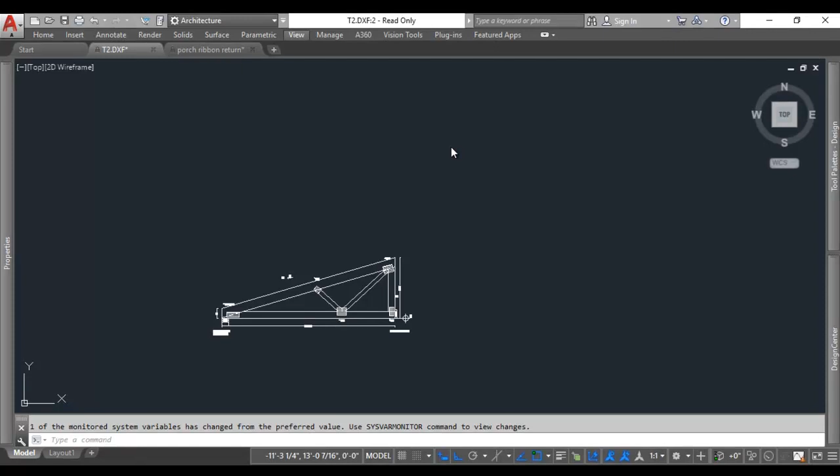Hello, this is Ryan, and in this next video tutorial we'll walk through the process for creating an isometric drawing of an actual truss. So the first step is to grab some dimensions off of your truss drawing so you know approximately what shape you're after.

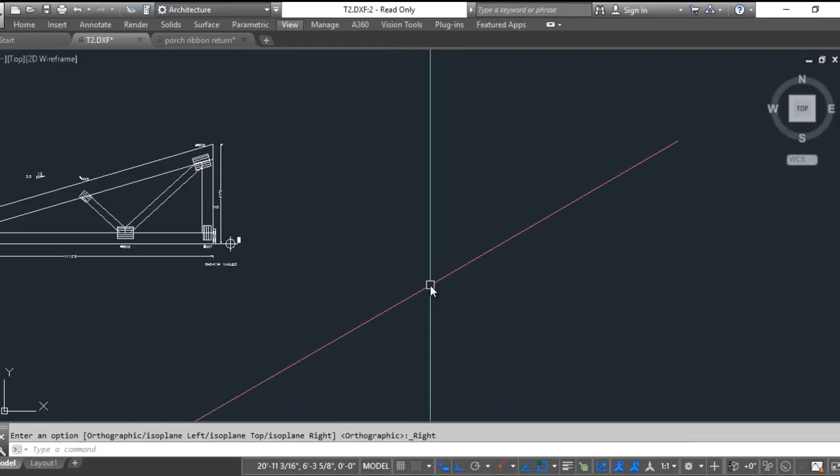So in this case, this is an 11 foot 10.5 mono truss with an 8-inch heel. 4 foot 1 9/16 is my high heel, and I have a 3.5/12 pitch. So I'm going to switch to my ISO draft with my button at the bottom and hit F5 until I get in the orientation that I want.

And my first step is to draw just the outline of the truss. I normally start here with the high heel. I have my orthographic on, 4 foot 1 9/16. My span, 11 feet 10.5, and then my heel is 8, and then hit C to close that. So there we have the outline of the truss.

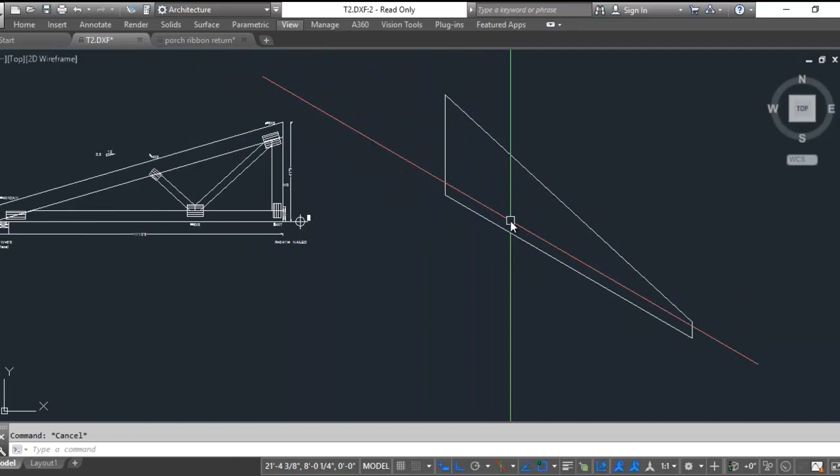The next thing is to get our webs and our chords, and we can't use the offset command in ISO draft, so we have to actually know the dimensions. So if it's a vertical or horizontal member, the easiest thing to do is a copy, and that bottom is a 2x4, I believe, so copy that up 3.5. My vertical web, copy it back 3.5.

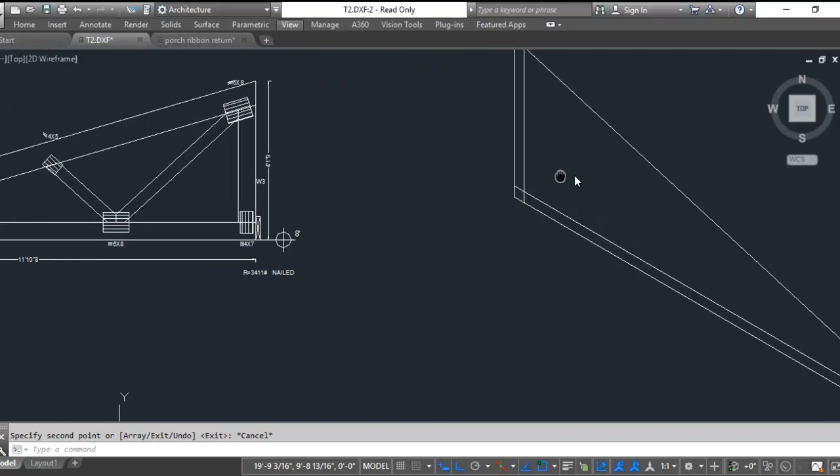Now to get this top chord, we've got to do a little bit more math, so I normally just bisect the top chord of my truss drawing with a line and then use the distance command to get the actual height, which is 7 9/16, which means that these are actually 2x6s. So I'll move those up another 2 and over another 2.

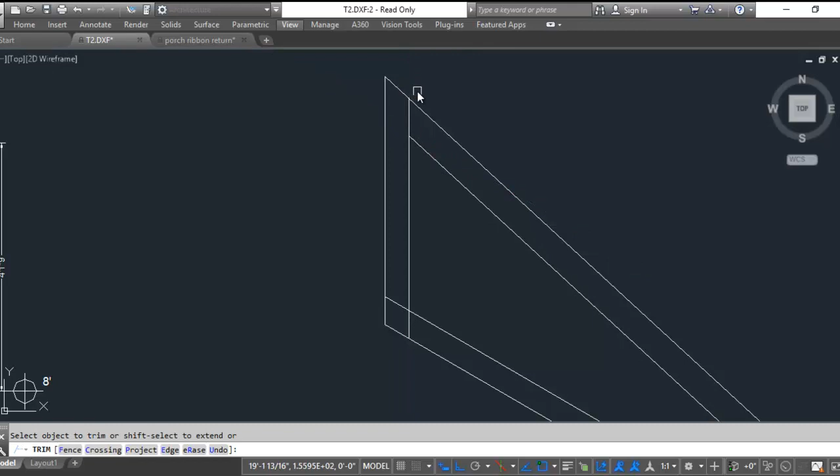So this here, if I copy it straight down, 7 9/16, that's the appropriate dimension for a 2x8. Then we can trim away the excess that we don't need. The way that these chords all come together, actually that's backward, looks something like that.

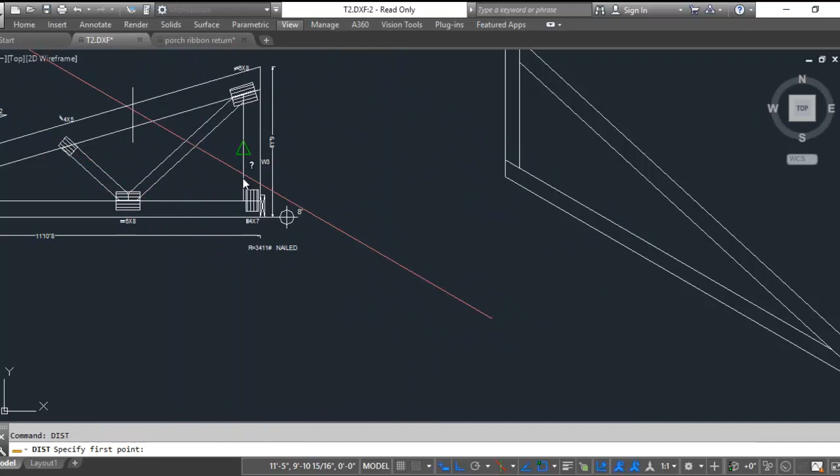Now for the webs, if you want to get them accurately, it's very possible to do them accurately, otherwise you can kind of ballpark it. We'll try and do them halfway accurate. So from the inner intersection to this panel point is 3 foot 5 5/16. So in my drawing, I can copy this forward 3 feet 5 5/16. That's that lower panel point, if you will.

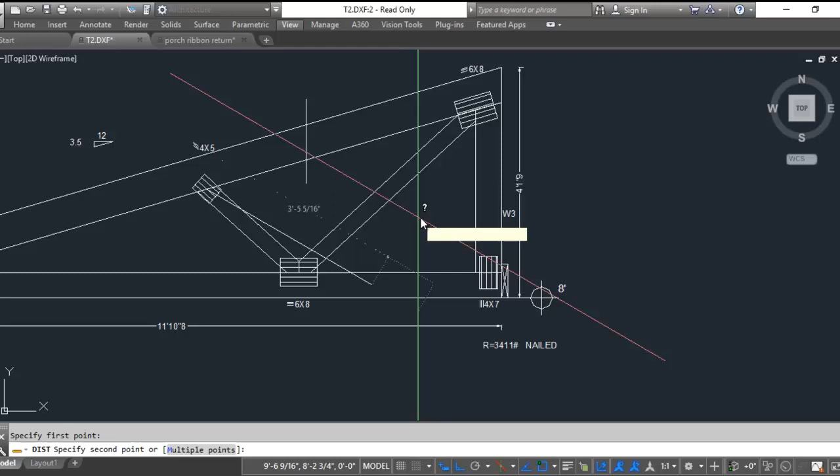And then this point here, I can do a distance and measure from the midpoint to here is 4 foot 10 3/16. So I can copy that forward 4 feet 10 3/16. And then from that point, it's just a matter of drawing lines for the center point of our webs. Get rid of my construction lines.

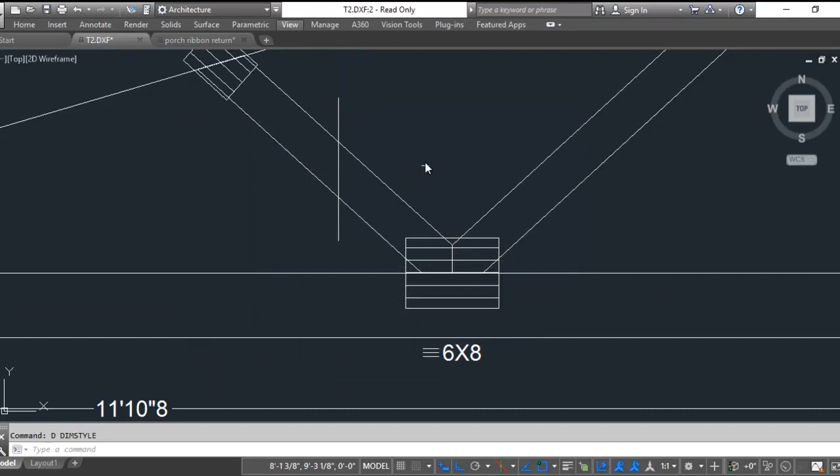And now we need to figure out how far to copy those. We can't offset, remember, so I've got to measure vertically. If I bisect this web, that's 4 11/16. So if I come back over here, half of that would be 2 and what would that be, 5/16 roughly, and then copy back up 4 11/16.

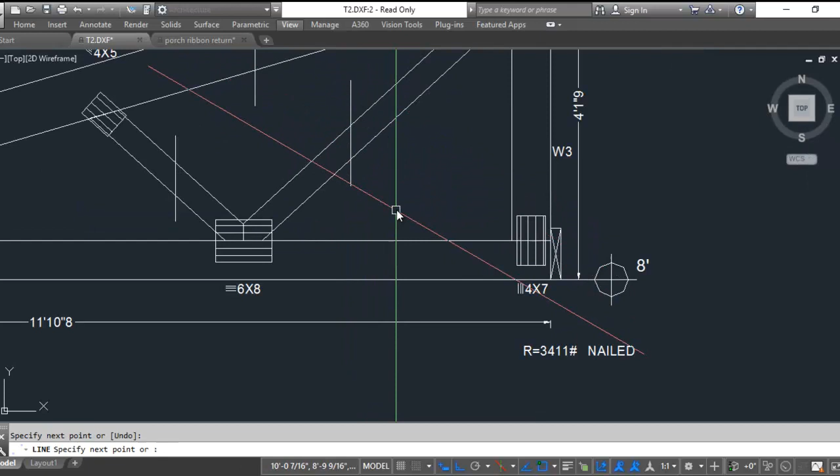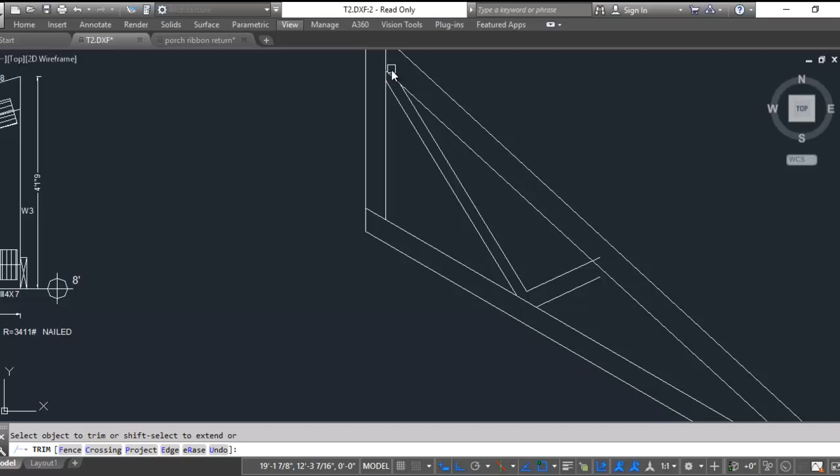That'll get us close. And then for this web, it's a different angle, so I should bisect it as well and measure it, and that is 4 3/4. So that'd be what, 2 3/8 is about half of it, like so. And then we just trim away the excess. And add in any additional lines, trimming away the excess.

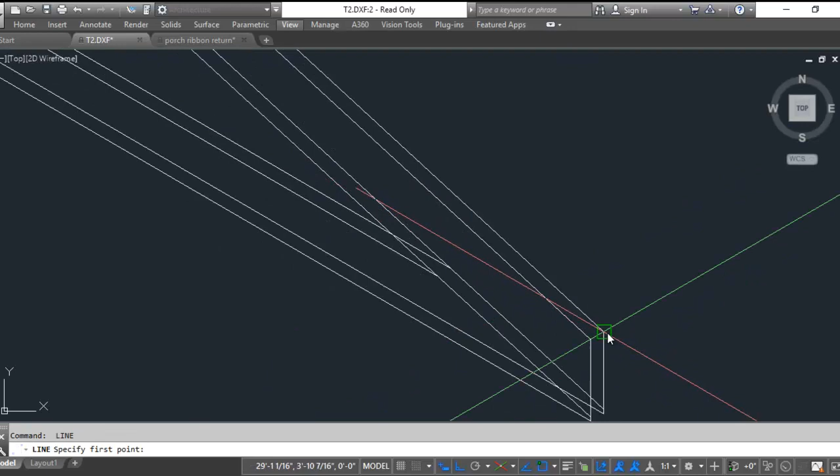So there's the face of the truss, and then to get thickness, all we do is take that truss, and I'm going to hit F5 to get my UCS moved that way, and move it over 1.5 inches. And then it's simply a game of connecting the dots where they need to be connected. And then trimming away everything that's extra in the background.

And I'm running on a slower laptop here, and the settings are not quite as I would like them, so it's obviously not perfect, but it works. So trim away the background there, trim away what's up above, and for some folks, depending on how your brain's wired, this step here can be the hardest step to figure out what to trim away and what to leave.

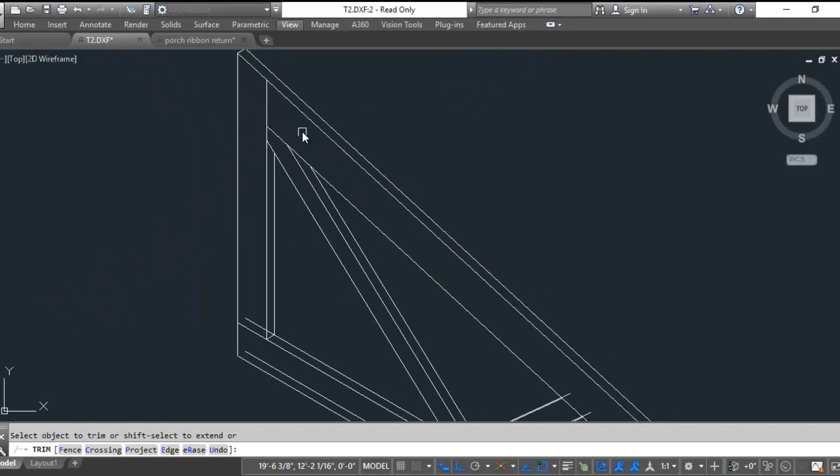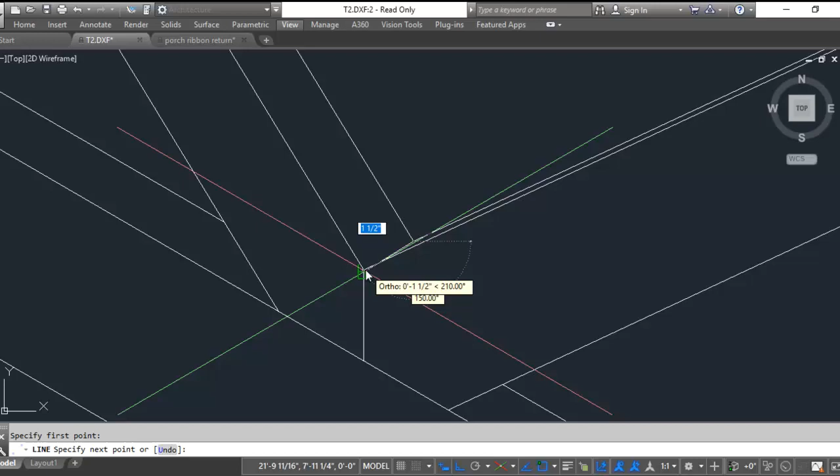So if you can visualize well, which most folks that can draft can visualize well, then you should be able to walk through it. And if you make a mistake, it's pretty easy to undo your mistake. So this should actually be a line, like so. That looks good. Get rid of this.

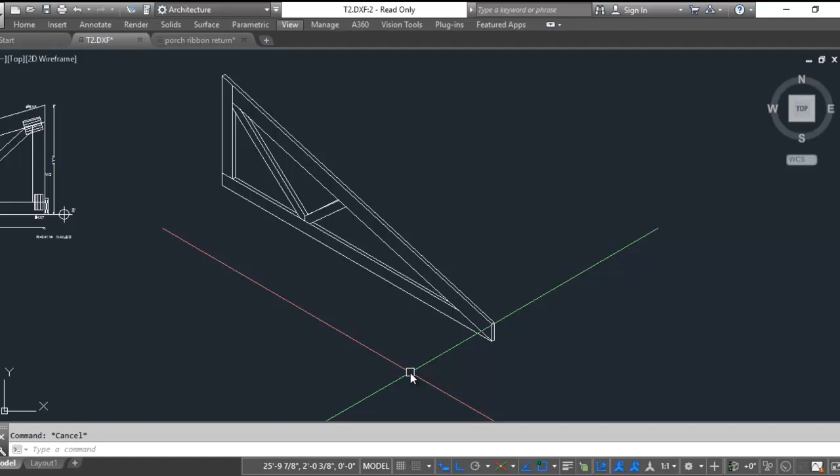Get rid of that. So here is our completed isometric truss drawing. And remember, this is all in 2D space, so it really blends well if you have lots of line work in a 2D drawing. If I was to orbit around, that thing's as flat as a pancake on the screen. So it's just an illusion that it looks like it's 3D. So just to remind everybody of that.